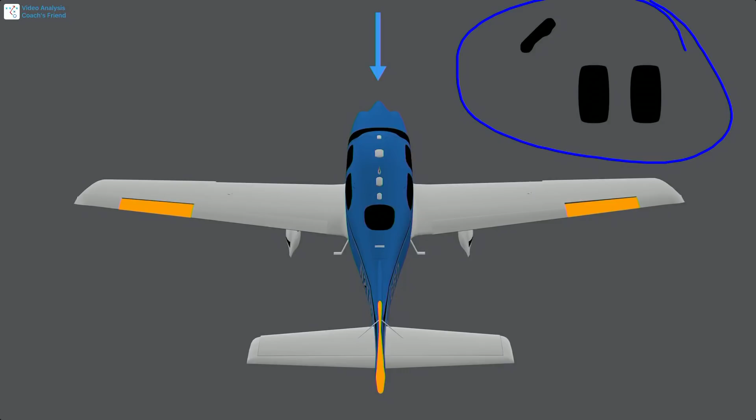Okay, and we're going to take a look at this from the rear of the airplane. So what you can see up here at the top are my controls. We have a side stick here, a Cirrus stick — you'll see that move — and then our rudder pedals. We've highlighted our ailerons and our rudder, and right here is our relative wind. So we're entering with the relative wind pointing straight down the airplane in perfectly coordinated flight.

We're going to lower the left wing for this slip, and we're going to watch those control surfaces. As I do that, I'm going to start to roll left. You can see my stick's rolling left, that aileron's going up to bring that wing down, this aileron's going down, and I've got my rudder swinging out to the right, giving me a force that's pulling my tail left, my nose right.

And now I'm fully established in the slip. Okay, so what you can see is the relative wind hasn't changed. It's still going like this, which means in a forward slip, my flight path is still perfectly straight.

But what I'm doing is I'm holding in control pressure. I'm holding in left aileron, and I'm holding in right rudder. And I have to keep those applied throughout the entire maneuver.

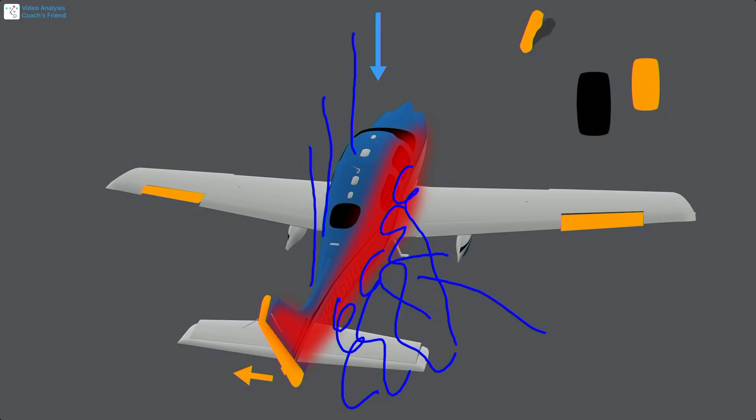And what that's done is it's generated a massive amount of drag, and you can see all that turbulence coming off the right side of my fuselage. So what's happening is the relative wind is striking the fuselage here, and this is generating form drag. So I'm increasing my drag profile. That's coming off the aircraft, and because I'm increasing my drag, I'm effectively decreasing my excess thrust or power, and the aircraft's descent rate's going to start to increase.

Okay, so how do you recover? Simple enough, you just let go. So as I re-coordinate the airplane, you'll see that the airplane swings all the way back to straight and level. It naturally rolls itself level, and the fuselage aligns.

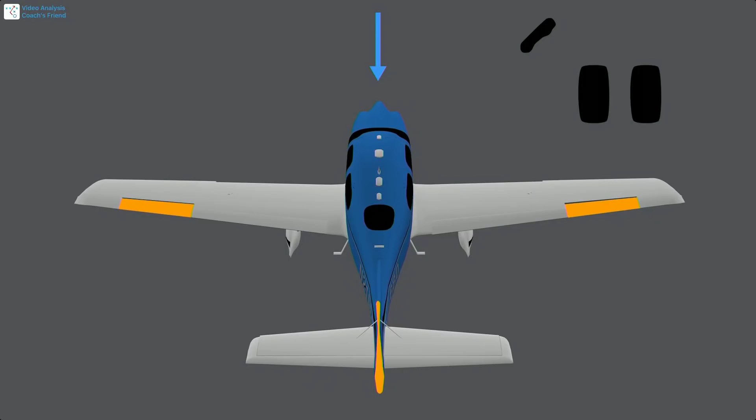And that's because if you take a look at what's going on here, first of all, the wind is hitting the fuselage, okay? And it's hitting that vertical stabilizer. So right there, as you bring that rudder back to neutral, it's gonna push the tail right back in line.

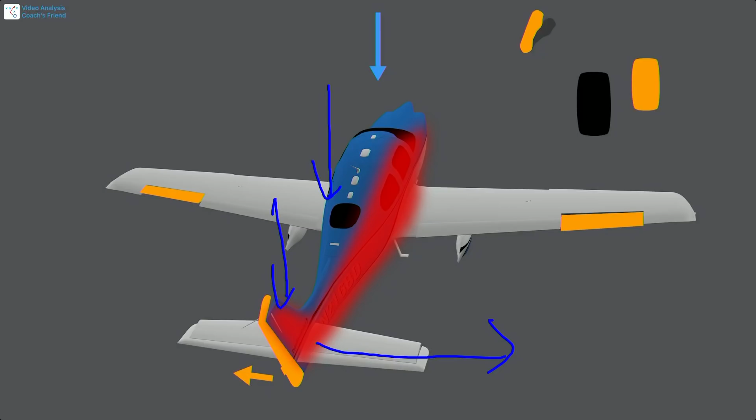You can also see a little bit from this image, we have a little bit of sweepback effect going on. The Cirrus has a slightly swept back wing. And so if you kind of extend out the relative wind here, what's happening is this wing has more direct relative wind than this wing. There's a little bit of an angle here.

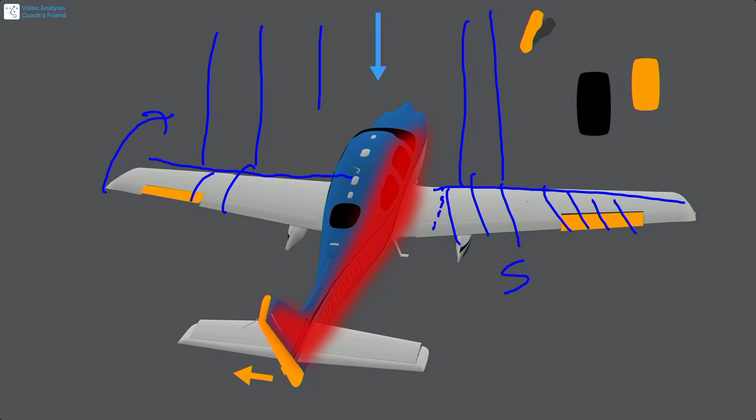So essentially there's more airflow over here. That's going to want to raise this wing. There's a little less airflow because the airflow is not going straight down the wing. It's kind of going sideways. And the only airflow that counts to generate lift is what we call chordwise airflow. So this wing feels like it's slower, and because of that, it naturally is going to roll back to level.

So you can see here, we'll play it through. The airplane naturally rolls back to level. Now, one of the downsides, if you just let go of the controls right away, is the airplane's going to swing past. It's stable, but that stability is not perfect. So as opposed to lining right up with the relative wind, if you just let go of everything, it's going to swing through and you're going to kind of rock a little bit until it stabilizes.

And since we're usually doing a forward slip down to a landing, we don't want to end up coming across the runway kind of fishtailing. So the key is just gently let the nose come back by releasing the rudder pressure, and gently let the airplane roll level by releasing the aileron pressure. But again, you're the one that's holding it in to the forward slip. To get it out, all you got to do is undo those control movements.

Okay, looks like we got a question.

Okay, so we got our first question in here, and that is, should we do these forward slips when we have passengers on board?

I do. But, you know, that really depends on your passengers' comfort with flying. So when I fly with my dad, Colin, obviously he's a pilot, so he doesn't count. But someone who feels very comfortable with the airplane, I'll do it. I usually let them know because it does feel a little bit awkward. It's one of the reasons why if we take a side slip, a lot of people like to crab all the way down to the runway and then just roll out into the side slip. Again, it's more comfortable for passengers because you're sitting perfectly straight and level. A forward slip, both the pitch and the roll can feel a little bit awkward. But if you get them used to it, if they're very comfortable with airplanes and flying, no problem. But again, it's something that I would let them know that I'm going to do before I actually jump into it.

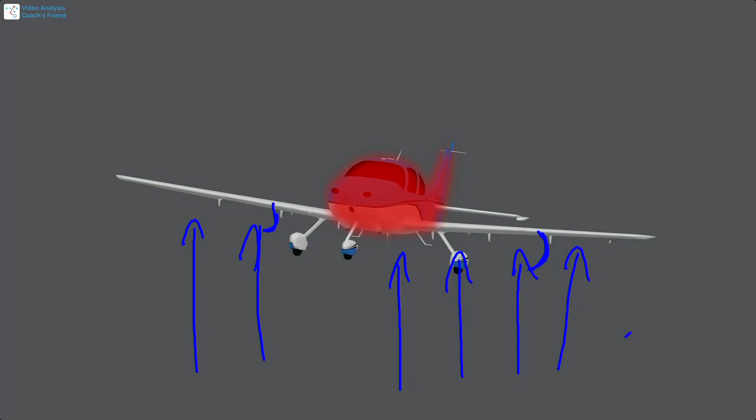Now if you think about it, look at the descent part, we're descending. So you've got this relative wind coming like this. Notice that the angle here is greater. This angle is slightly smaller because this wing is tilted up. We call that dihedral effect. And that dihedral effect will actually push the aircraft right back up to level flight.

As we let go, dihedral effect is pushing us back up to level flight. And what you can see at the bottom, that's your normal fuselage drag profile, and that's the profile with about a 15-degree slip. So you can see we can generate a lot of drag. Again, the easiest way to get it out is just to gently release those control inputs.

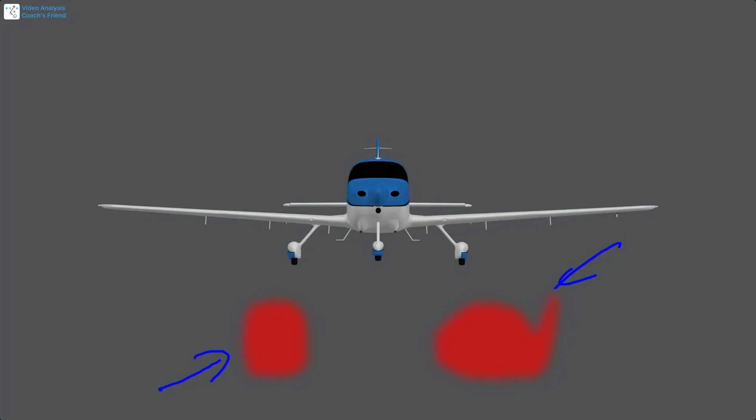So let's take a look at us doing this in Trinidad. Okay, so in this case we're on base to final. You can see the runway right here, Trinidad, Colorado. You'll notice my flaps are up, so we're going to fly this as a no flap landing. That's one of the things we'll use slips for. If the aircraft's flaps have failed and your throttle's all the way at idle and you need to increase your descent rate, a forward slip's a great way to do that.

So you're going to see us do this. Again, we're in the SR22 Turbo today, so our final approach speed's 90 to 95 knots. That's what I want to try to keep the aircraft at, so I'm using my elevator to control that. You can see I roll right from a left turn into a forward slip to the left with the left wing down. I've got a little bit of up aileron in the left wing keeping it down, and you can see I've got right rudder keeping that nose over. You can see how quickly my descent rate's increasing, about 1,000 feet a minute right now.

And I'm holding 95, my planned approach speed. As I re-coordinate the airplane and go to flare, you can see that descent rate stops and we touch right down. And that's kind of the key.

So let's talk about some limitations. Not every airplane is meant to slip with full or no flaps. A great example is the older 172. If you look at the 172 with the 40-degree flap setting and read the POH, you'll find that forward slips are prohibited with full flaps. Some of the later model ones, I think the P or N model, recommend that you don't slip the airplane with flaps in. So one's prohibited, one's not recommended. What's the deal? Let's take a look at a 172, its flap, and its airflow.

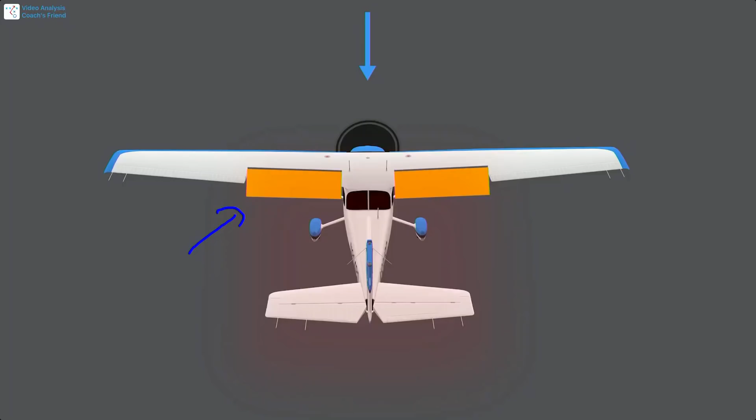So here you have a 172, we have the flaps down to 40 degrees. Again, this isn't one of the later model 172s, it'd be one of the earlier models. With those 40 degrees of flaps, there could be a lot of airflow separation, turbulent air coming off the back here. And as we roll into a slip, what you're going to find is that airflow can start to blanket the horizontal stabilizer and the elevator. In the 40-degree flap model of a 172, that can cause loss of pitch control.

And of course you're doing this at low altitude. All of a sudden you don't have much pitch control until you recoordinate the aircraft. It can make it a dangerous maneuver. So in the 172 with full flaps, the manufacturer says just don't slip it with full flaps. In some of the later models they recommend not slipping with flaps because you could get some buffeting as it hits that horizontal stabilizer or elevator, or you might get a little bit of sloppy controls. It's not dangerous enough to prohibit, but you might start to feel some adverse effects.

Okay, looks like we got a question.

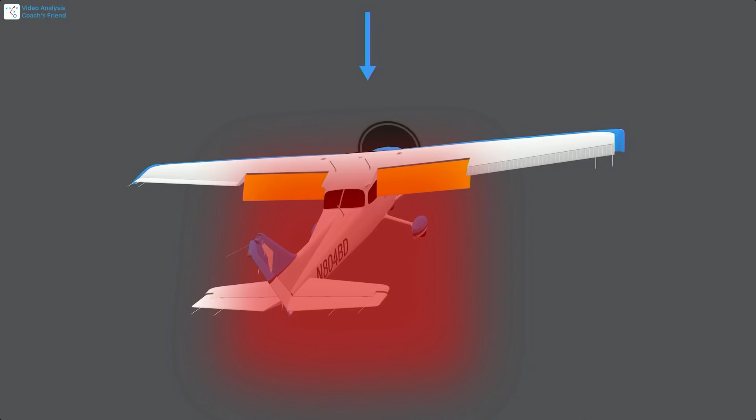Okay, so I'm going to hop in here, Alex, and we had a question I think that really ties in well with what you're talking about right now, and that is, should we use full flaps with forward slips, or really, should you use any flaps with a slip like this?

Okay, so that depends on why you're slipping and the manufacturer's recommendations. First of all, if you look at a 172 with 40 degrees of flaps where it's prohibited, you shouldn't slip with full flaps. And if the manufacturer doesn't recommend it, I'd avoid it unless it's an emergency. Otherwise, you can slip, like in an SR-22 and a Cherokee, the Warrior I flew, with flaps full or no. So it really depends on the scenario. A good example of where you may slip with full flaps is if you're making maybe a backcountry landing, or even some of Colorado's paved airports where you have really steep approaches.

You might have the flaps down to full, but to plan a very steep approach, you can still roll the airplane into a forward slip. Something like an obstacle landing, and oftentimes they're not even that short of a field, it's just that there's an obstacle on your way in. So that's a case where you might want to forward slip with full flaps.

Okay, so how about without flaps? I'm actually going to jump ahead to the emergency approach and landing. In an emergency approach and landing, we all know to set up for a point if we can, try to fly a standard traffic pattern. But as we add flaps to increase our descent rate, those are almost permanent changes.

Okay, so here we are, coming in on final, and I'm going to transition. You can see our crosswind is out of the left. And we're going to transition into a side slip. I'm going to bring this wing down, add right rudder, that'll swing my nose to the right, and then I'll be able to set up and go right into the side slip as I get up to the runway.

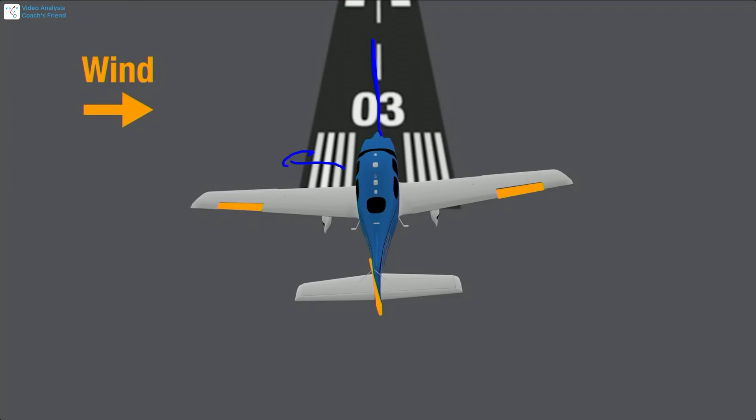So here we are in a forward slip. You can see us nose to the right, left wing down, but as we roll out, now we keep that left wing down. We just make little adjustments with the aileron and rudder to bring the nose right in line with the center line, and now we're still in a slip, but we've got a little bit of sideways motion that's countering out the wind. The rest of it is forward motion.

And if you were to go back in this timeline to where we're in the forward slip, we're really using a combination of a forward slip and a side slip, because we're still generating a little bit of side track to keep the airplane moving forward. So in a crosswind, you're always going to slip with the wing towards the wind because you're really doing a combination of the two slips.

So that brings up a question also that people have, which is, what happens if I stall in a slip? Am I prone to spinning? You're uncoordinated, and you're oftentimes at low altitude in a slip, so the concept sounds a little bit dangerous. And of course, any sort of a stall, if left uncoordinated, can lead to a spin.

But in a forward slip, the airplane is actually going to try to recover from the roll for you. It's going to roll itself back to level during a stall. And if you release your control inputs, it essentially will fly itself out of the slip and the stall all on its own. So let's take a look at that.

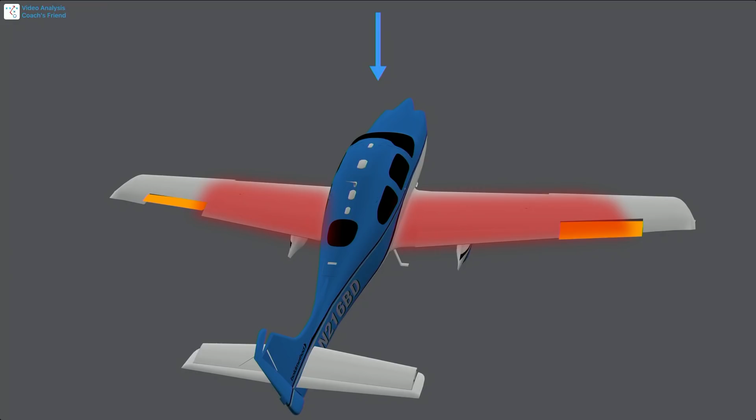Okay, so in this case, let me clear out our drawings. You can see we're in a forward slip, and as we increase our angle of attack, this stall region, the red region here, is progressing out along the wings. And what you're going to find, watch which wing ends up with more stall. You can see it's the high wing right here. This wing is stalled more than this wing.

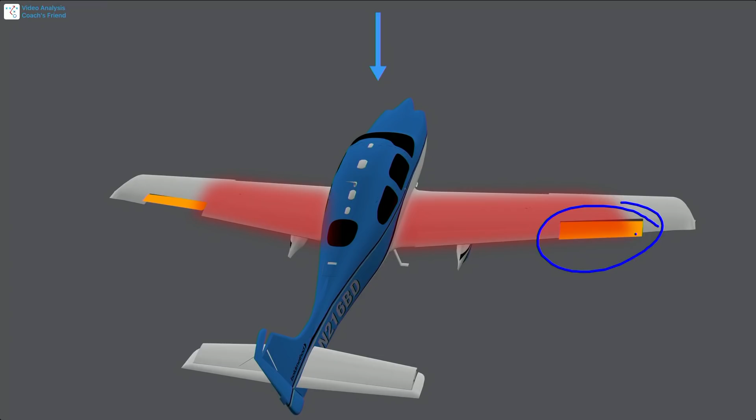Okay, so why is it that? Well, there's a couple things. First of all, this wing right here is receiving more direct airflow. It's essentially getting more chord-wise airflow right over the wing, and that's generating lift. This one here, because of the sweepback effect, has got a little bit more of an angle to it, and because of that, it feels like it's moving slower. So that's one issue. You can see this aileron is pointed down, so that's also raising the angle of attack of the wing. And so all of that is causing this wing to be more stalled.

And as the aircraft enters a stall, you'll see immediately this wing, which has a higher angle of attack, drops, and it brings you back towards recovery. At the same time, your vertical stabilizer and the fuselage are pushed back by the relative wind, and the aircraft wants to line itself back up.

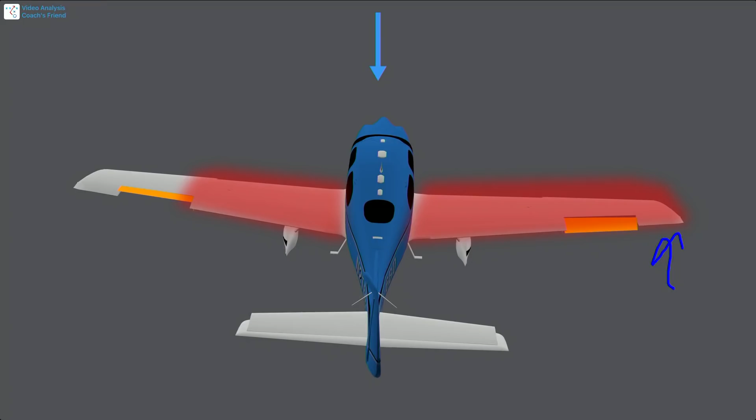Now, of course, if you left your control inputs in, if you held the aircraft in an uncoordinated scenario, it could enter a spin. But the reality is, if you let go during a forward slip, the aircraft will try to roll itself level, and it basically feels like a normal stall recovery.

Okay, we got a question?

Okay, so Mark's got a question here that ties right into what you've been talking about, and that's stall risk. I'm going to add just a little bit to this. When you're doing a forward slip like this, is it going to increase your stall speed? Is it significant? Is it not significant? Talk just a little bit about that.

Well, it probably will increase your stall speed just a little bit. You might have a little extra load factor on the airplane, depending on how much back pressure you have in at the same time. You definitely have one wing at a higher angle of attack. You're not really turning, but you might have a slightly higher load factor. So it could increase the stall speed, but I would say that change is going to be very, very small. It's not an increase in stall speed like we'd see if we're maneuvering in a turn, tight base to final turn. So really, you kind of trust your stall speeds are going to be right about as published.

And so that's why in a forward slip, I'm typically going to fly the exact same speeds that I would use in coordinated flight. I don't want to get any slower. But if my final approach speed is 85 knots and I'm going to forward slip at 85 knots, the change in stall speed is going to be pretty minimal.

One of the things you can do is go out with a flight instructor. Again, a forward slip's not an aerobatic maneuver. If you've never stalled the aircraft in a slip, go out with a flight instructor, they have, and see what that feels like. You'll see the aircraft rolls back to level. If you've never done it before, I would absolutely do that with an instructor. But you really start to see that the aircraft itself is very stable and it's going to recover for you. And of course, you don't want to stall at low altitude because that recovery can eat up a couple hundred feet. But you will find that it starts to roll the wings level.